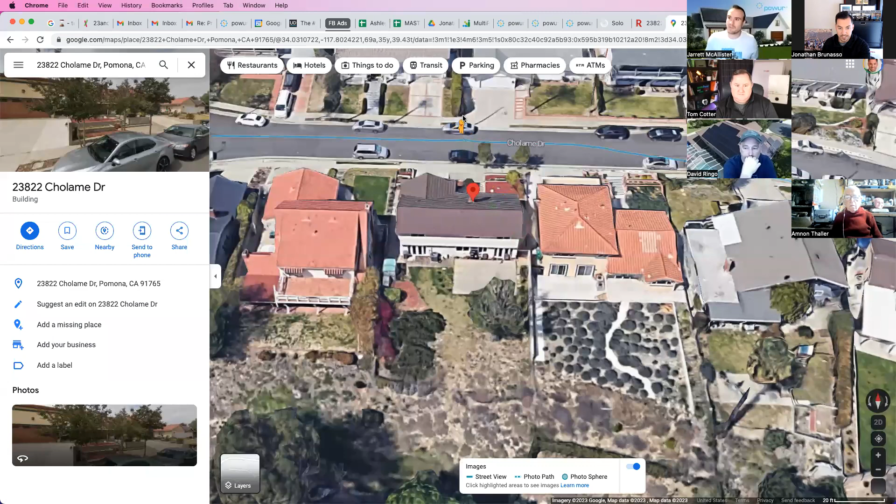And as I mentioned, did anyone type into the chat what type of roof material this is? Yeah Jonathan, I'm going to take a stab at it - is it clay tile? This is stone-coated Decra metal tile. It is metal, and sometimes there's no plywood underneath - you would have to do a comp out, recessed, custom inlay.

So for all those reasons, I suggested the ground mount. Now you always want to go into adders and mounting adders and make sure to scroll to the bottom on a computer or desktop and click ground mount. In some states, the ground mount may include some trenching. In California, it does not include trenching.

Now whether you go to the property on site or whether you use this not-so-fancy tool here - I don't know if you guys can see this, in the bottom right of my screen there's a 20 feet little marker, about an inch long. So if I were to go from the very bottom of the hill, 1, 2, 3, 4, 5, 6 - 6 times 20 feet - you can ballpark it, use a tool, go on site, or just put in an estimate. I just estimate with Google.

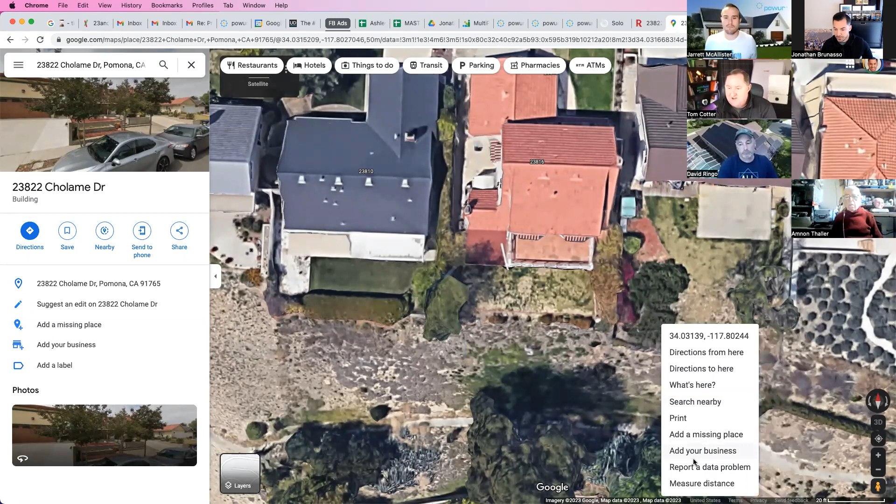Hey Jonathan, at the bottom of that hill, right click where you think your ground mount is and measure distance - click your point and then click another point up by the house. Dang, Tom, 95 feet, you beat me to it. I was going to tell him too. See, I learn something every day. We all do - I learned about Redfin today.

Some dirt trenching - it looks like maybe there might be a little bit of concrete to get to that electrical panel. So you always want to have a safe buffer. So obviously we have the mounting adder, ground mount, and we have some trenching or possibly some concrete trenching.

And let's go ahead and go back to this.

As far as the inverter goes, SolarEdge or Enphase, I've heard different opinions on different topics. I don't know if either of you guys have an opinion here, but I've used both, and both tend to work well for me for ground mounts.

Now, usually with big ground mount solar systems, there might be some electrical work. Often these are mansions, and if they have a 400 amp panel or 200 amp panel, usually there is either a derate, a sub panel, or possibly an MPU. On some really nice big mansions, if you're doing a 400 amp main panel upgrade solar ready with today's prices and inflation, you're talking about $7 to $9 grand of electrical work if you have to do a 400 amp. So make sure to work with a tier 3, watch Paul Leon's electrical training, and anticipate some possible electrical work if you're doing a large ground mount on a big property, which is often most ground mounts.

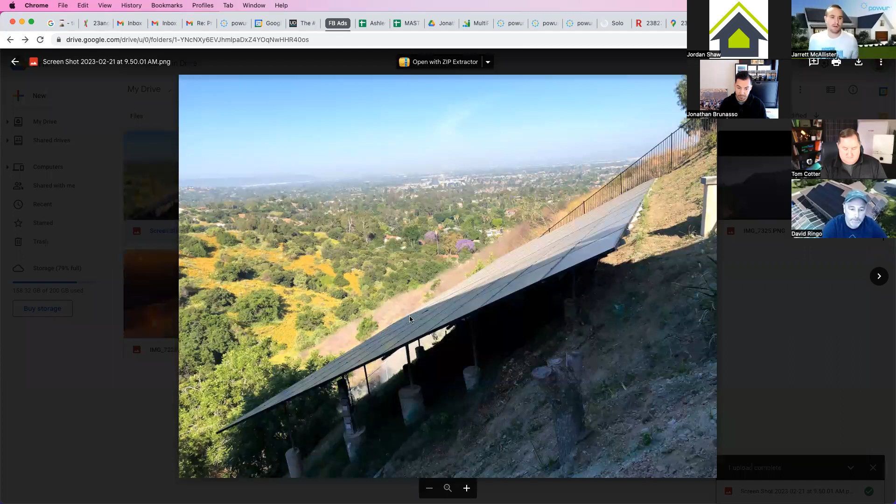This one was quite steep, so likely it's going to require some extra labor because of the steepness. And you can see the concrete posts are actually coming out of the ground. Usually they use like a bobcat machine, a little mini earth mover, or a handheld auger to drill the holes, pour the concrete, set the posts, have to let it dry for a day, and then come back and install the racking.

So let's look at some more pictures. That was the weirdest looking skate ramp I've ever seen. It's a slip and slide.

Here is one that Barry and my brother Chris just did. They're gonna come out with a new video on it. You can see here the concrete pillars that were put into the ground, left to dry. You can see that they're still putting some solar panels on the racking railing there.

Jonathan, question about the concrete pillars: is that included in the ground mount adder cost, or is that an additional cost? Good question, that is included. Okay.

We should probably mention, for a rooftop system, most of you know the minimum number of panels is 8. Probably not the case with ground mount, right? Because you have ground mount mounting adder cost, trenching costs. So probably 5 or 6 kilowatts would be the minimum you'd want to shoot for a ground mount. And the further away it is from the interconnection point, probably the bigger it needs to be to make it pencil.

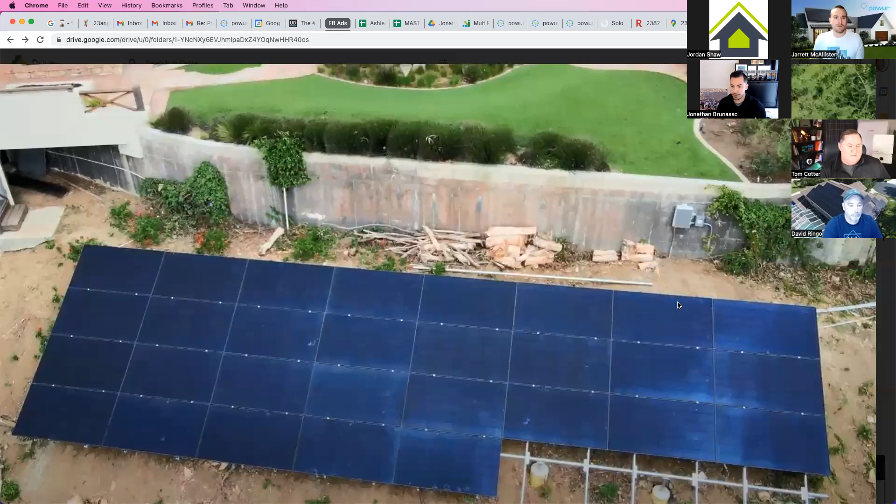Often you can see they trench through the dirt here, and you can actually see the Enphase combiner box. So usually the combiner box or the SolarEdge inverter is either on the racking itself or very close by to the actual solar system.

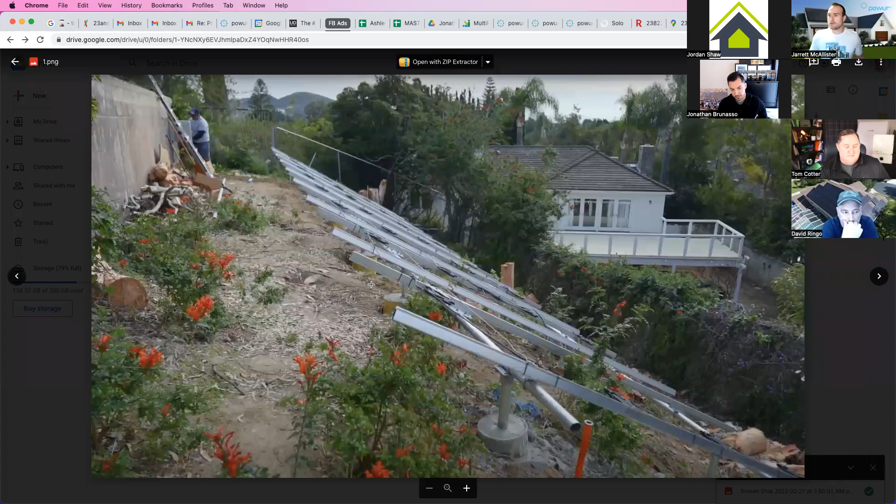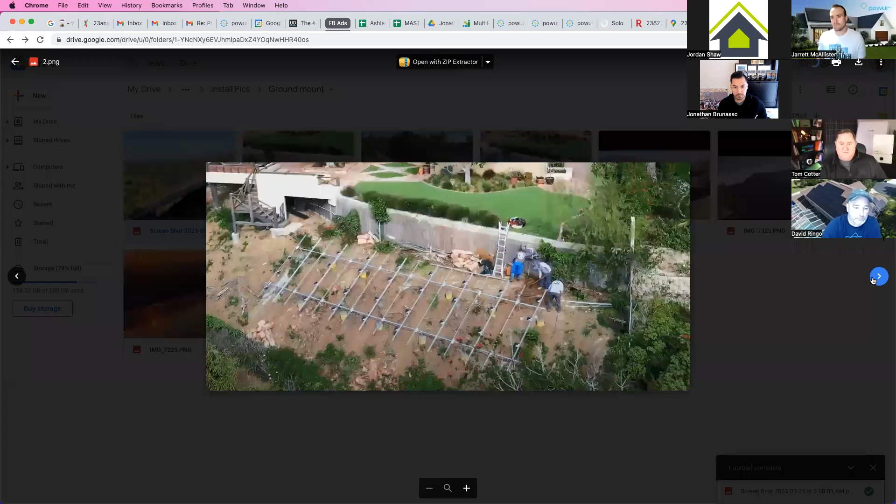This is that same system. You can see the gentleman working in the combiner box right there, and you get a little better picture of these posts - I believe it's like a 2-inch metal pipe that gets latched on, and then you can install the racking and the railing onto that. And you can see they're actually setting up the Enphase micro inverters under every solar panel. Here's another shot finishing up the racking there.

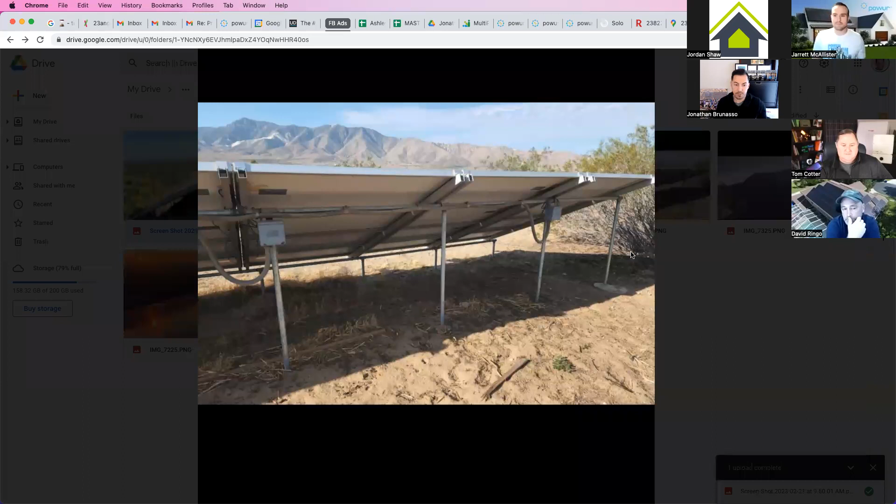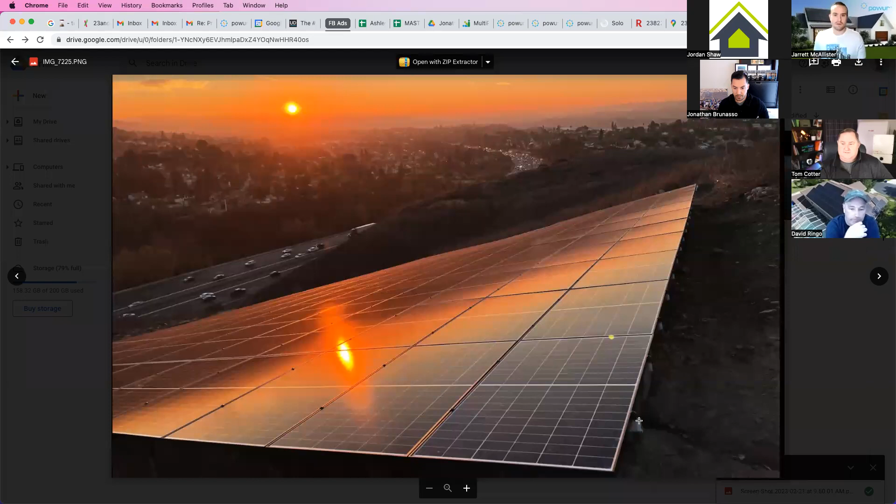Here's another one in Joshua Tree that I ended up needing the fence for. Turns out Joshua trees are protected, and we needed a $2,800 fence. So that's another one. There's another one. And this is a 100-panel ground mount in the city of Diamond Bar that I did as well.

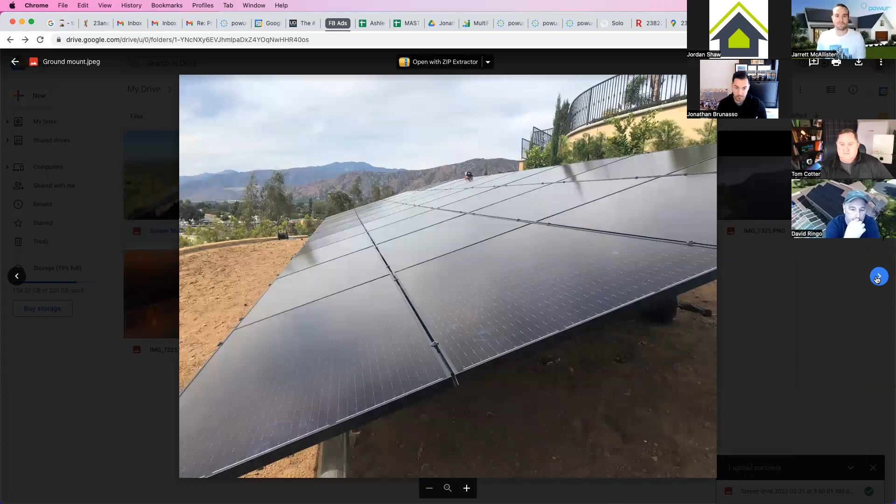That's a clean looking one right there. And that's the one in Glendora. So have that handy, save, bookmark that.

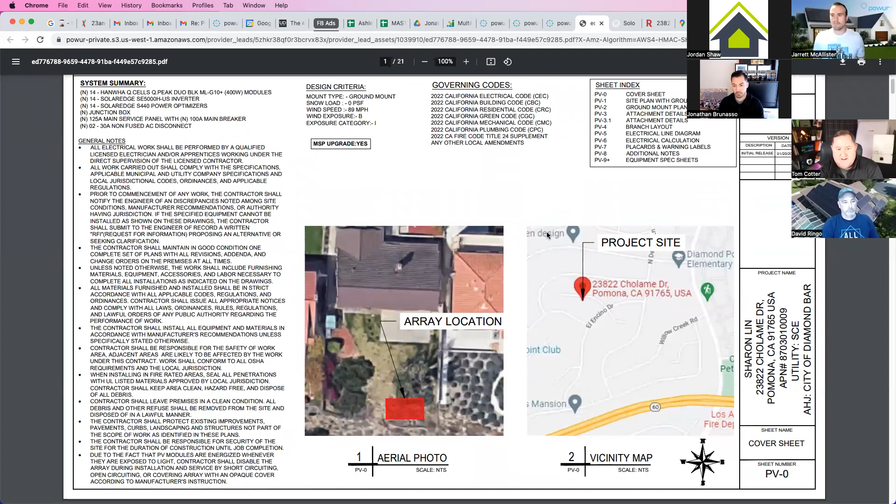Anything else to add, Jarrett or Tom, on ground mounts to be knowledgeable about? Yeah, the default that our company uses is a 20-degree pitch for ground mounts. So if you're in snow country, Colorado, and maybe you want a steeper pitch, whether it has to do with snow or production, you can always put that into your proposal notes when you request it from Solo for that. And the angle of the panels will change the production of the panels.

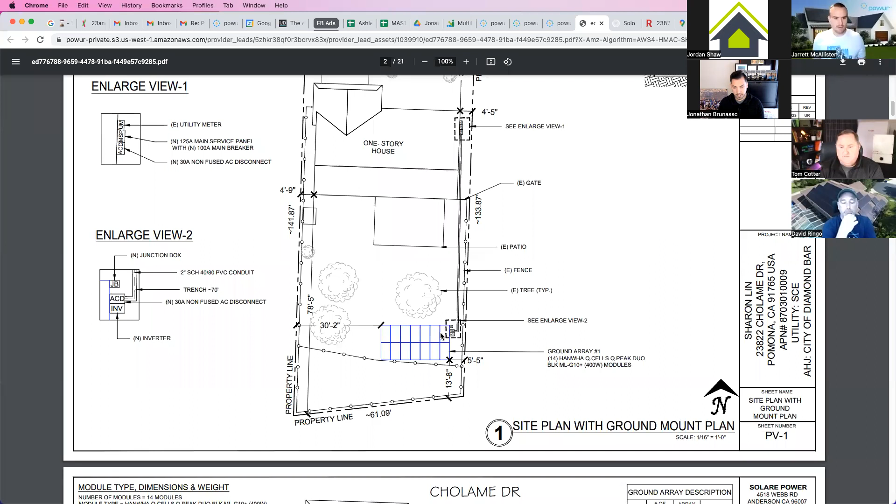Yes, good point. And the plans will show the depth of the trench, 18 inches minimum for those posts. And you get to see the location. It'll show the property line. So all good information here. You can always leave a ticket for your project manager to upload this to your assets, and you can see it looks like a 30-degree tilt here for this one.

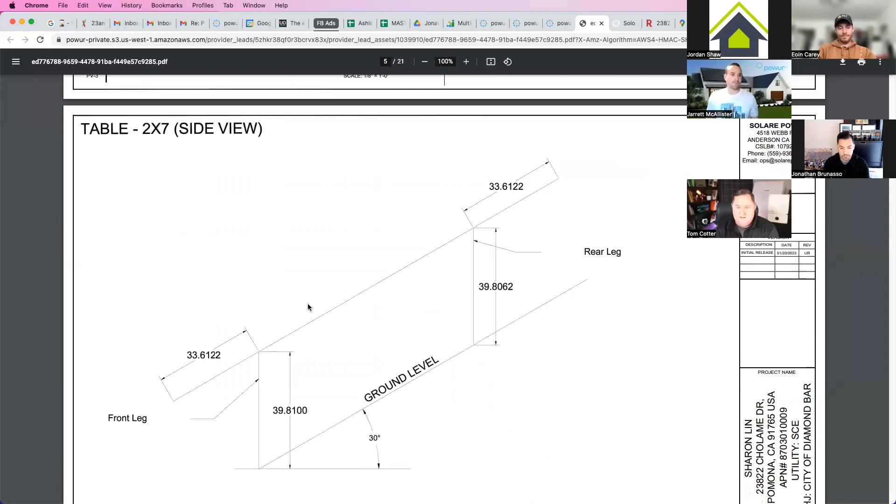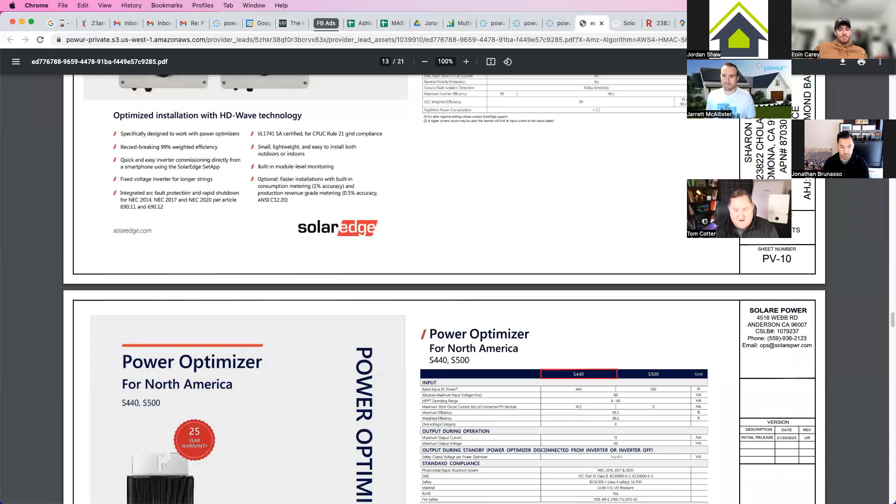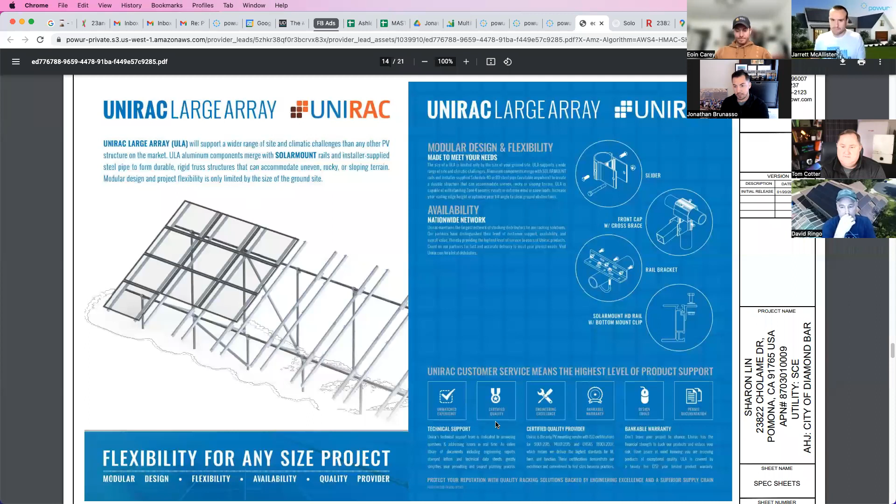And I will mention, if you're putting it on a hill, typically the angle of the array is going to match the angle of the hill. That's usually what they do by default. And we do use Unirac - that is our go-to mounting railing racking company. In some unique cases in Florida, we might use IronRidge, but we largely use Unirac components for racking.

Jonathan, Eoin has a question, he has his hand raised. Sure, I did it the polite way.

Thanks. Just because I know everyone's had the question - what if the homeowner wants to do the trenching themselves? Do some counties or cities, when you do trenching, have to come and inspect it, or do they just trust that the installer did the trenching correctly?

It's safe to say that you have to have the trenching open so the inspector can see it, and then likely they might even want to inspect it after. So there are certain depths required for trenching, which I don't know the local code on, and I'd be surprised if a homeowner knows the local code. If they want to dig at 12, 18 inches, I don't know how far down.

They can, and that could help the installers. But I mean, to save a few hundred dollars, I would advise against it. But if it's open and then we can get it inspected, then I would just set that expectation. Got it. I usually tell my clients, call before you dig as a PSA, like PG&E has, for example. You might dig up a gas line and that would be a nightmare. So, how do you guys handle that objection?

Great point. There's water lines, gas lines, and Cynthia just said sometimes there's septic systems, which you'll need special plans to inspect around. So unless they're a licensed contractor, I would strongly advise against that.

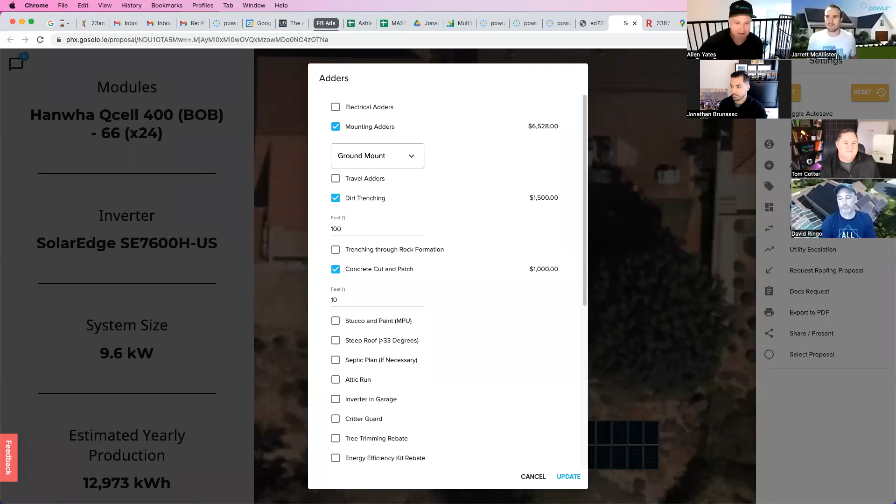So the question I have for you is the maximum distance from the box, the main panel. What's the maximum distance you've seen? We're doing some homes in Texas where they have a lot of property and want to mount these way out in the middle of the field, 500-600 feet away from their home.

So I'll answer this, and it's a rough guess. A lot of you know I keep things simple, and then I set expectations - that's all we should really do. If you overcomplicate it, it's not always needed. But my answer, Allen, would be once you start getting in the 250 feet to 300 feet range, that's really the upper limit of when you're going to start to need thicker cables. Anything below 200-250 feet, you should be okay. But once you get to 250 or higher, 300 especially, you will absolutely need thicker cables to avoid the decrease of energy as it gets to the panel.

Anything beyond that, there may be a device, like we have with batteries, where you have to pay for this extra device to beef up the voltage to continue to flow. So that's generally my answer - I'm going to say it's case by case. Anything above 250 feet, pushing 300, just be aware those cables can be $2-3 grand for twice the gauge. And anything farther than that, you may need a special repeating device that I'm not even aware of.

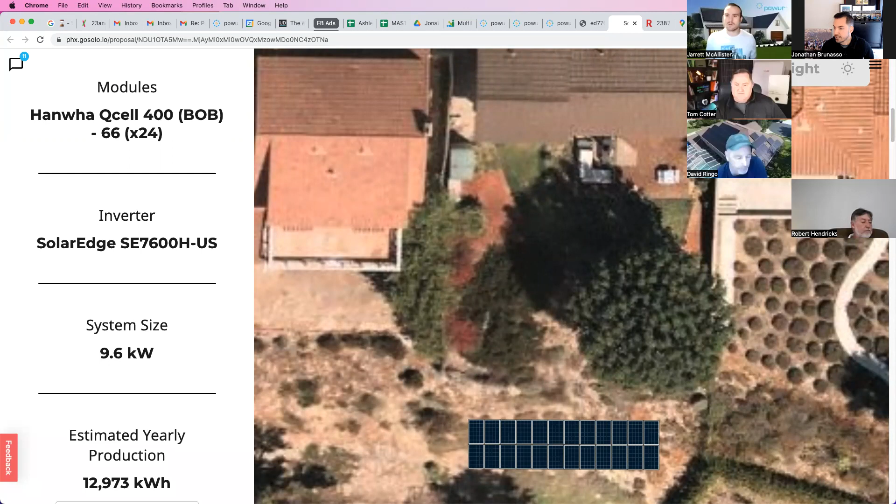On the earlier part of your presentation, the red dot that you were pointing for the ground mounts, what software, what tool do you use to create that red dot within that area? I just use my iPhone - when you take a screenshot, volume up, power button, it lets you draw on the picture. You can also find a very easy Chrome add-on. I'm sure Tom has a fancy drawing tool called like Snagit or something, but there are a lot of different ways to do that.

Thank you. Fred sounds like he's in protective services. Kind of hard to hear.

Well, I think that really gave a lot of information around ground mounts. Let's go ahead and move on to the next topic, and we'll stick around for some Q&A and office hours after this as well.

So one more topic I'd like to cover, guys. This is another common question. It is around the tax credits. A lot of people specifically ask about the rental properties, investment properties, and roofing.

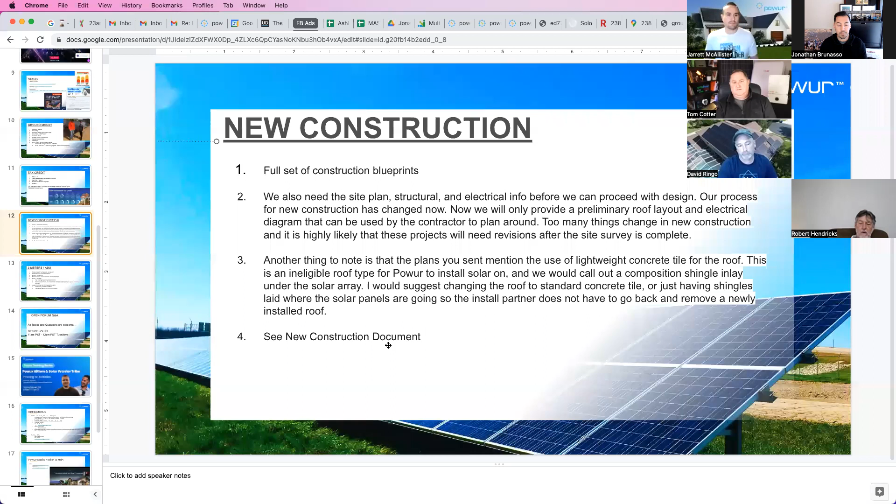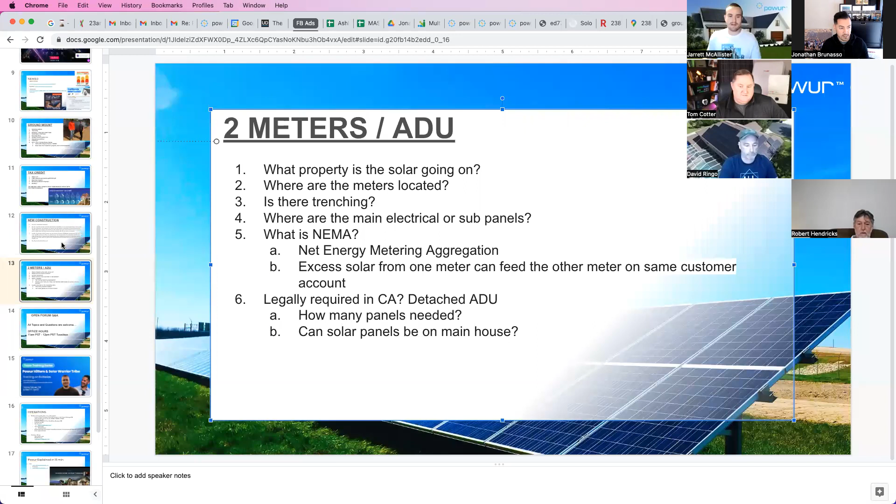So ground mounts, tax credits, and then we're just going to do 20-30 minutes of open office hours. All topics are welcome for the next 10 minutes. So let's touch on ground mounts and tax credits. Next week, guys, as mentioned, we're going to hit new construction, how to get the design plan sets, what are some of the requirements for new construction. And another extremely common question is, what if there's 2 meters? What if they're building an ADU? Are they going to get another meter, or should they keep 1 meter for the property? What is NEMA, net energy metering aggregation? What are some of the legal laws in California on ADUs? So we're going to touch on these topics next time.